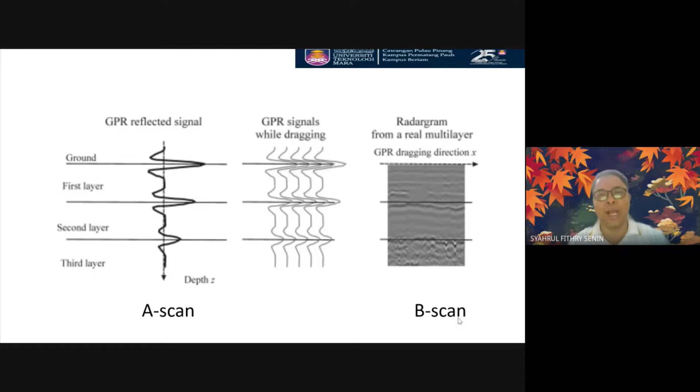Some of my research at that time was to understand the amount of moisture content in the concrete cover. So let's say this is concrete, and this is a large enlargement of that cover. Remember, this is the cover — maybe 30mm, 25mm, depending on the design.

And we put a certain amount of moisture content inside this, and we put the GPR antenna on top of this. The antenna radiates certain electromagnetic waves through the medium, and the medium reflects some of the energy back to the receiver antenna, giving reflections of that signal.

As I said, the signal variation is very complex, and you need a way to understand the relationship between the signal reflections and the amount of moisture inside the concrete cover.

Why am I studying this, the moisture content inside the cover? Because I want to know the state of health — tahap kesihatan, the state of health — of the concrete cover.

Remember, if you don't care about your concrete cover's health, in the long run you will face deterioration of your concrete quality, especially to the reinforcement — the rebar will corrode once the amount of moisture content exceeds certain threshold values.

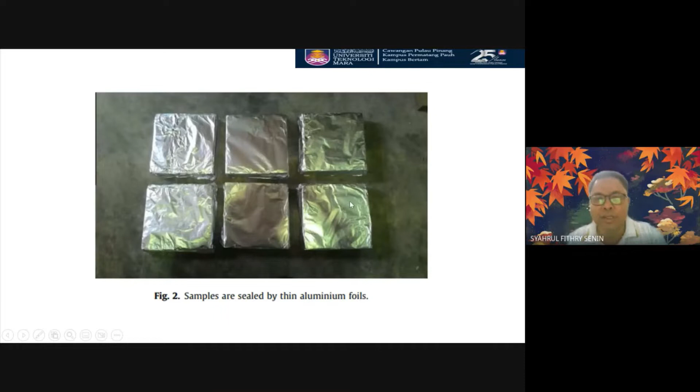And we got some results, and this result I have to close off, because this is a secret, and we have to measure the amount of chlorides and the moisture content against the data of the GPR.

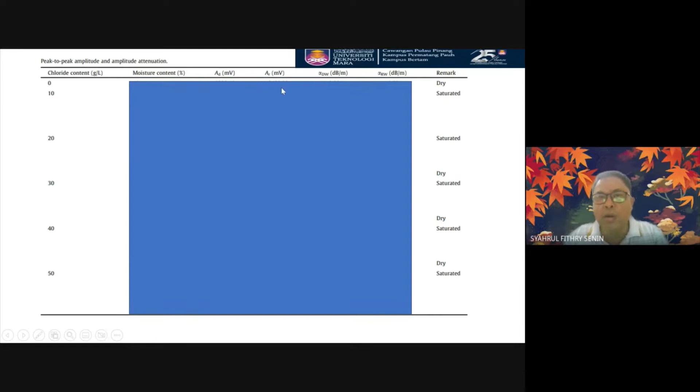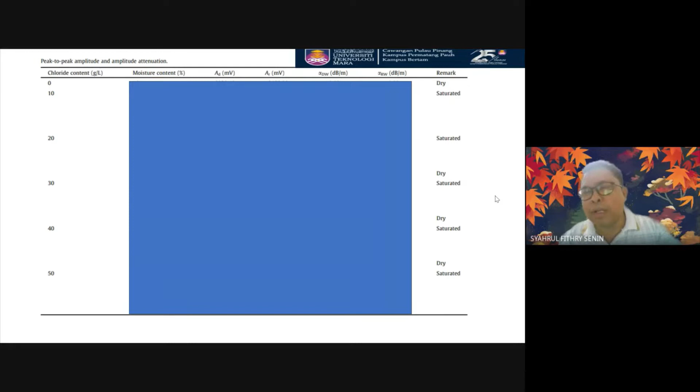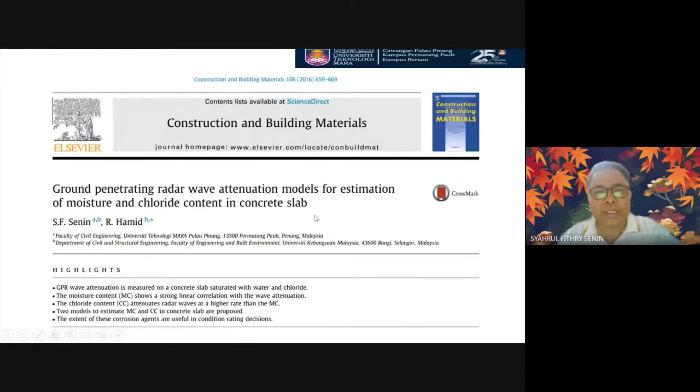Once I plotted the relationship in 3D, because at that time there was no empirical relationship developed by researchers, I used only a normal regression. It was published in the journal Construction and Building Materials, I think in 2016, volume 106, titled 'Ground penetrating radar wave attenuation models for estimation of moisture and chloride content in the concrete slab.' At that time I did it with my supervisor.

And we got this result. But at that time, I didn't use any artificial intelligence. I just used polynomial or nonlinear regression to try to relate the free chloride content, which you can see on the screen, and also the moisture content on this axis, to determine how much the reflected wave was. So if I do an experiment on the concrete cover and get a certain amount of reflection of the GPR wave, I can use this curve to estimate the amount of chloride content as well as the moisture content using this complex surface.

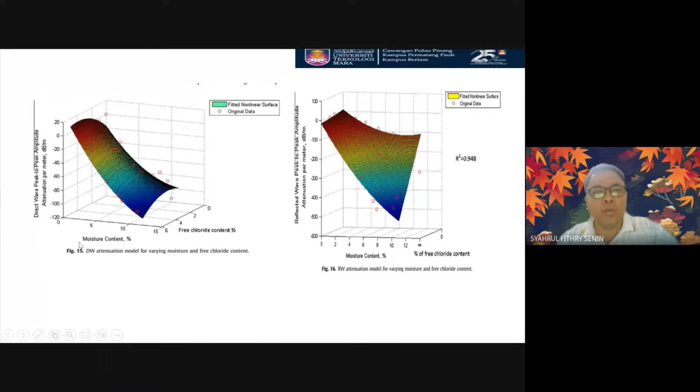So we have two models here. One is due to the direct wave, the other is due to the reflective wave. So whoever works with GPR will know the difference between these two. This was not yet used by a lot of researchers at that time, so we successfully published one paper.

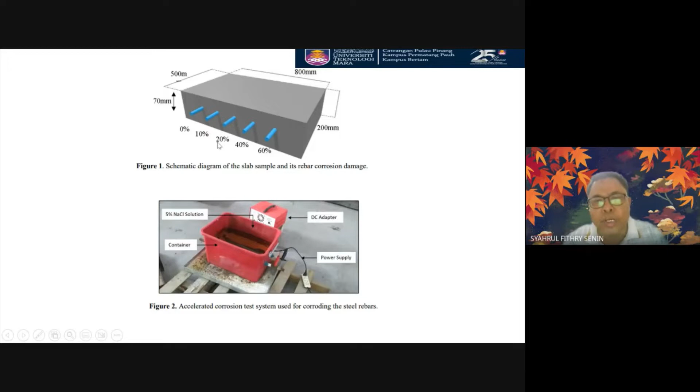After that, I tried to use B-scan. I extended my research around 2019, and we published a paper where we tried to detect the damage of rebar that had been artificially corroded. We didn't use the actual corrosion mechanism because that would take too long. We used a impressed current system to simulate corrosion on the rebar. The slab itself is 500 mm by 800 mm by 200 mm thickness, to simulate the bridge deck. This is the system we used to initially corrode the rebar, and we embedded that corroded rebar back inside the slab, then scanned it by GPR, and got these complex images.

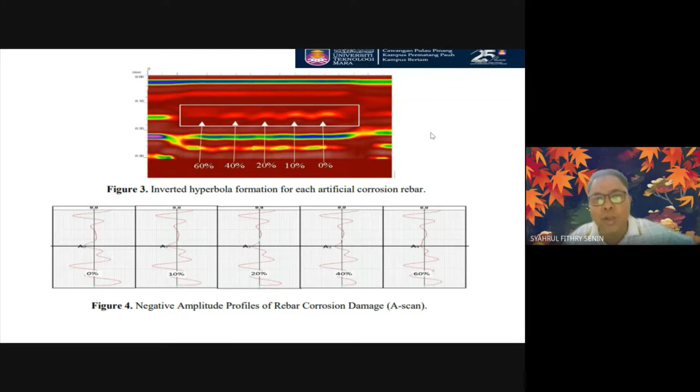And I think the lecturers at UNIMAP, and also the students, can take this motivation to develop their research, maybe in a master's degree, a PhD, or a final year project, because this is a very interesting project - to interpret automatically what the damage severity is based on images.

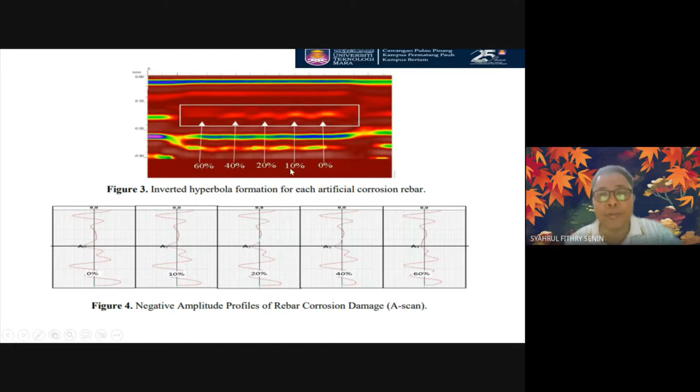We don't do any measurement, but we just pass our image to a system, and the system estimates the severity of that damage. The system can also classify the damage type, whether it's a crack problem, due to corrosion of rebar, or a void problem, and so on. These are some of the other works that have been published using the GPR system.

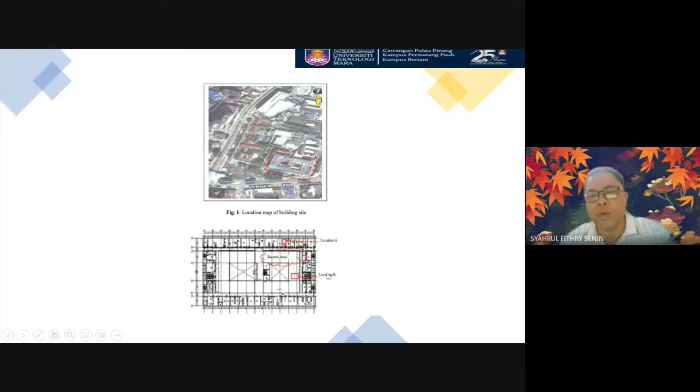It's a hospital at Kuala Lumpur. I don't remember the MRI building. One of the blocks had been under fire, and we were required to investigate the damage severity. This is the place where we focused, and we got a lot of these images.

So imagine for novice people who don't know how to interpret these images, it's a problem. It's just like if you bring your pregnant wife to a doctor, and the doctor uses some kind of equipment put on the stomach of your wife to see the images. For a trained doctor, they can understand the thickness of your baby, where the baby's head is, and so on.

So the same thing here - we are acting as a doctor, but a doctor of a building. We try to understand the location of that problem and how severe the problem will be.

So again, for novice people looking at these images for the first time, they may just see dots and spots, but not know how to interpret it. But for a trained eye like me, using a manual approach, I can identify the concrete deterioration that exists, and some cracks also introduced at certain depths of the concrete due to the fire-affected system.

So if these images were passed to another person, this is a problem. That's why we need artificial intelligence to perform the assessment automatically without any human expertise at all.

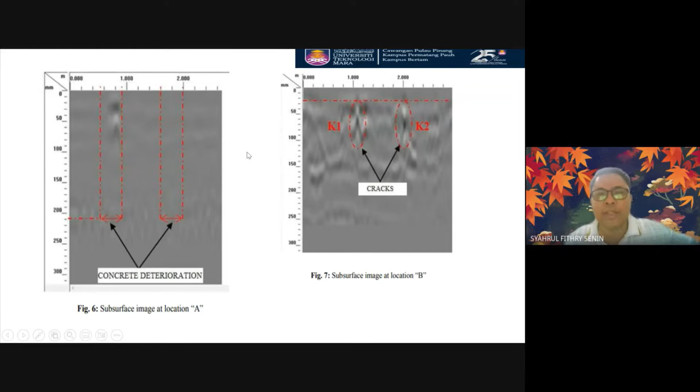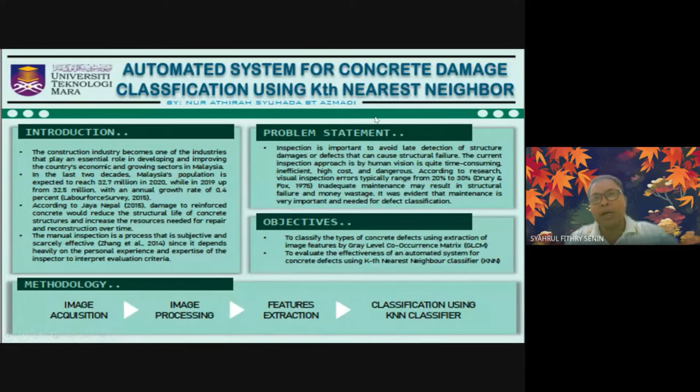So this is the algorithm that we use to detect the features for the classification.

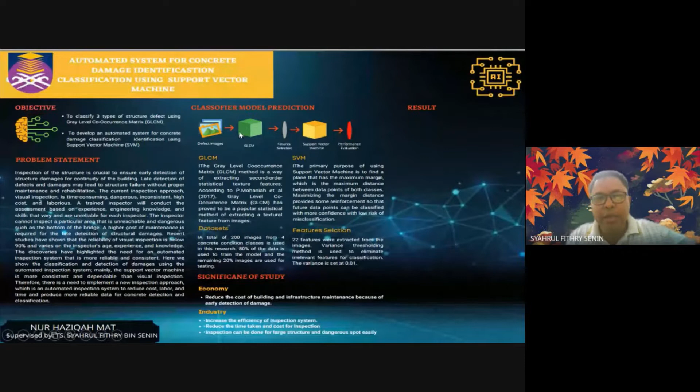And also another exhibition we entered using support vector machines. And another one, I think the more popular one, is using Naive Bayesian classifier - we also did the damage classification identifications there.

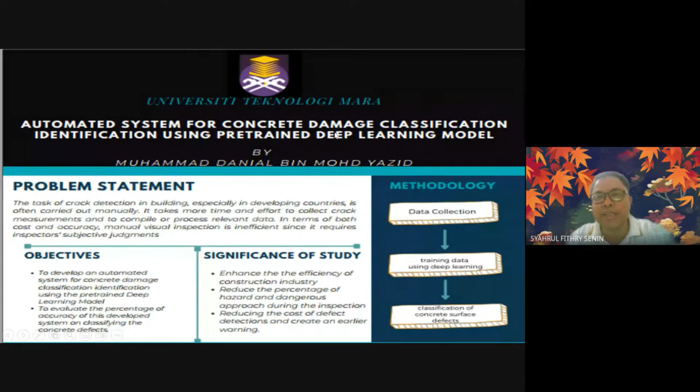This is the most popular one, I think, using pre-trained deep learning. I think most of you have come across this word, deep learning, in your YouTube videos. We got gold here for this exhibition, where we trained the images that we got from concrete to detect the damage kinds inside the concrete.

And after that, I was not only focused on the damages, but also used artificial neural network, which is a subset of machine learning and also a subset of artificial intelligence, to perform concrete mix design.

Usually, most of you will do the concrete mix design in your class using the DOE method, and you have to use a lot of charts, a lot of tables to figure out how much will be the amount of cement, the amount of water, aggregates, fine aggregates, and so on.

But using this system, we can specify what will be our grade, what will be our environment, and then the system will choose the best ingredients that you can put into your mix in order to achieve that minimum FCK or FCU.

We are using data sets based on the experiment - data sets to create a model that can automatically predict what the ingredients should be. So I'm not only using my AI knowledge in damage research, but also doing material research as well, because the domain of application is very, very vast, very big.

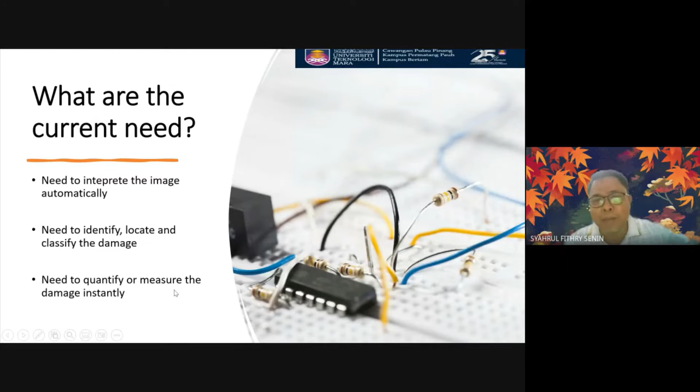In my case, to measure the damage state - how many percent, is it 30% corrosion? How long is the crack, is the width 2mm? What if there's a void - how large is the diameter on average, is it 1 millimeter? This is the most challenging part, but it's not impossible with artificial neural networks or AI.

So I think I've gone through a lot on artificial intelligence, but we can say that AI has a lot of applications nowadays, and it's very popular for human needs, not only in practice in civil engineering, but also in civil engineering research work.

A lot of companies worldwide are now investing their money because they can see a good fortune in this technology in the next decade. That investment can solve various fields and bring money to them. And if you apply a lot of money in research, that innovation will also give you fame, and you will get money for your university.

In a lot of engineering disciplines, why do we need AI? Because we need decisions, and usually decisions are done by expert people - but we are lacking expert people in the world. So how do we copy their expert mind so it can contribute to the society that needs it, in a system? That's why we need AI - because AI can copy their mind, and that mind can decide for a lot of applications, especially when we want to achieve certain KPIs or objectives.

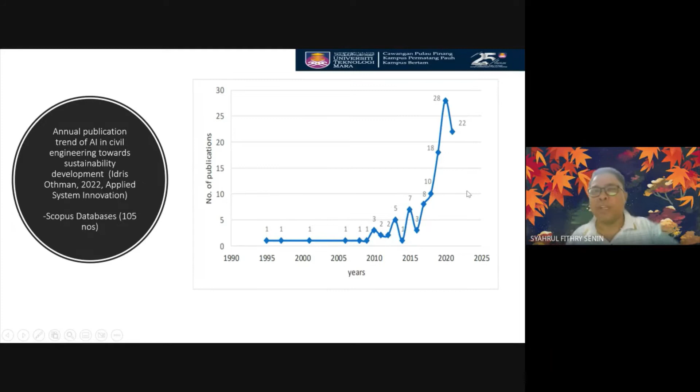You can see the trend is very, very good - an exponential growth in work published in this field. It started in 1995, very small, but the numbers kept going up until 28 in the year 2020. I think during COVID-19, for about 2 years, much of the work couldn't be done, especially to get the data, so the numbers went down.

So that's why you have a downward trend. But I don't think this trend will be downwards. It will keep positive until 2030. So it's a very good prospect doing research in the academic world.

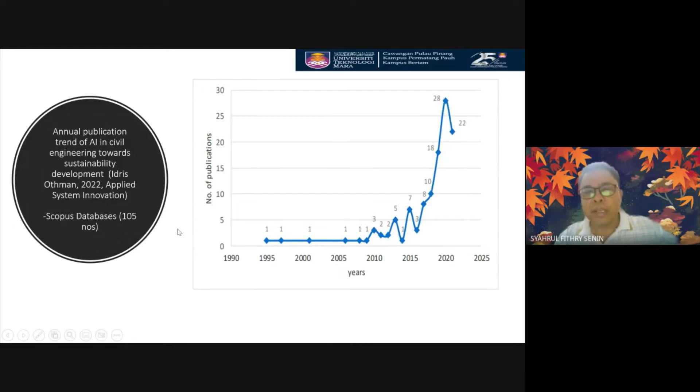You can see the publications, and the publications have been done by typing these keywords. So we type a lot of these words and we get these publications.

In terms of journals that have contributed, you can see that a lot of the journals focus more on automation, because remember, AI is for decision making. We want to have automated decisions. That's why a lot of researchers like to publish in this journal, Automation in Construction, about 57% from the 105 papers, followed by Advances in Civil Engineering.

And a very small part, which is 1%, I think this is a journal which is not so famous, but people still publish there, Arabian Journal for Science and Engineering. So you can see these are the journals as an academician that you can publish for work involving artificial intelligence. So you can select Automation in Construction. This is quite a famous journal and a very prestigious journal, I think it's a Q1 journal.

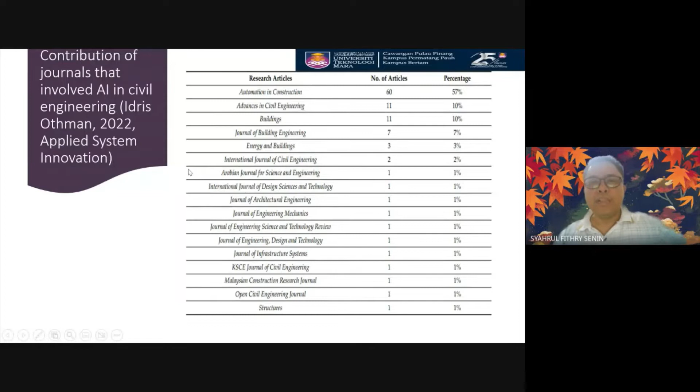Remember that the main substance of AI is data. That is the most important part. The data, a large amount of data, will be the source of the model.

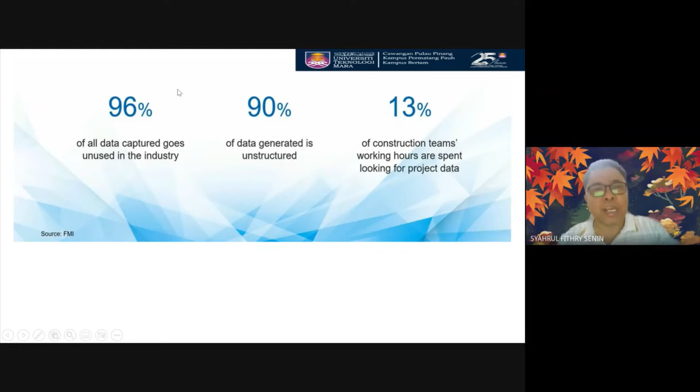However, from findings of a consultant company from the UK, especially in construction, not in research work, 96% of the data that is being accumulated in the office is not used in the industry. It's not used in the civil engineering industry. So imagine if that data is passed to us as academicians, I think we can do a lot of things in research involving AI to help the industry.

So I think it's an opportunity for the lecturers as well as the students to ask the industry whether the data is usable for AI, so that you can make use of this data, and we will build our AI model to help the construction teams outside. So I think this is an opportunity for us to do this.

And in UiTM Penang itself, we have already approached and also got a job from the Jambatan Kedua, the second bridge linking Batu Kawan to Batu Maung. And we have already been given the job to classify the damage based on the accelerometer data that they have had since, I think, 5 years ago, but it's not yet been analyzed.

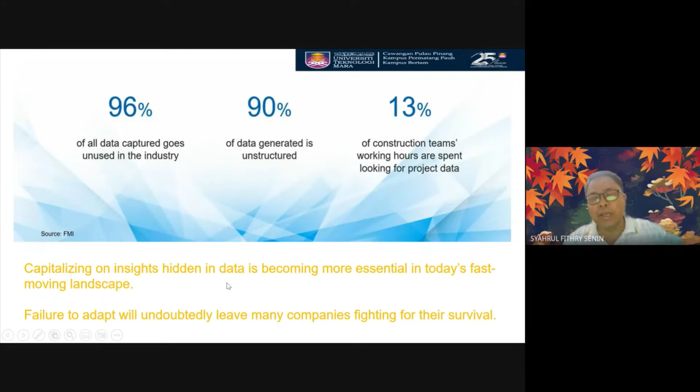So we are using that data to classify the damage, and we can consult them on what are the severity and the repairing work. So I think you can do the same thing with nearby industry to get their data, because most of the data is unused. They just put it inside the office desk and do nothing with it. But in fact, if you combine it with AI, you can solve a lot of problems, because data is the capitalizing aspect that will color the image of the construction industry.

They can collect the data by using cameras on the site to track progress, where you can see whether this column has been fabricated or not, and they can map the state of the construction stage. So you don't need as much supervision, the number of people supervising will be minimal, so you reduce the cost of construction by using this AI system. You can view the site remotely, and we can get the data.

As I said before, data is the essential part of the AI system, where we can perform decisions on what to be done. If, let's say, today this column should be fabricated, but by using that camera, it has been detected that this column is not yet fabricated, the system will artificially try to find that and report it. As an engineer, you can act on that problem remotely, so you don't need to be at that place at all times. This is one of the companies.

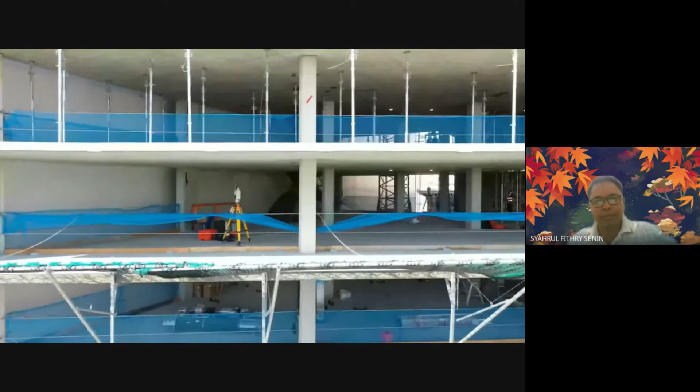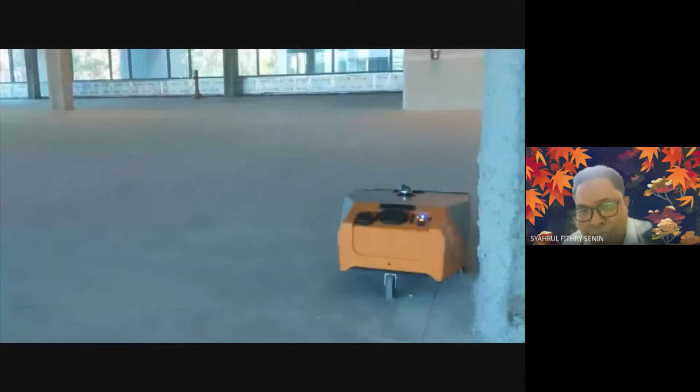So this system is using robots, and the robots can draw on the slab where the location of the wall should be. You may see that the dimensions are correctly printed on the slab. This is done by artificial intelligence, and there is one person there controlling the system. This system gives good efficiency for the laborers so that they can put their wall in the right spot.

Imagine how much the cost will be reduced by using robots.

This drawing is drawn using BIM technologies. I think most of you know about BIM technologies. That robot does its job based on the drawing done by BIM, building information modeling. I think most of you know about this. That's why I think it's good for all of you as students to study BIM, because BIM is one of the technologies linked to AI. So it's good for students to learn BIM nowadays before you graduate. That is my advice to you, as preparation before entering the job market.

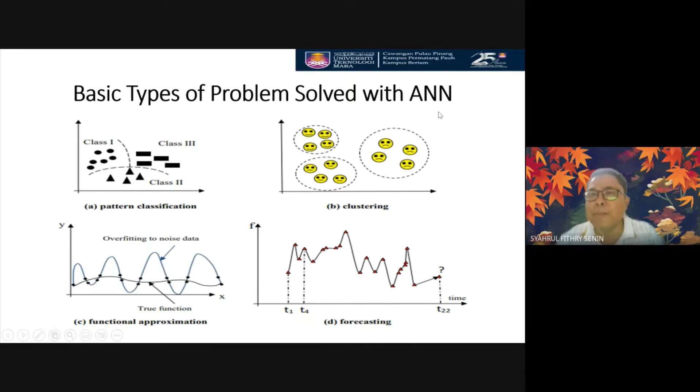So these are the basic types that you can model or solve using ANN. Remember, what is ANN? It's only a model for solving problems by mimicking the human brain mechanism.

And why do we use ANN, artificial neural network? Because of 2 factors. The first factor is the learning ability. Our ANN has the flexibility to learn anything - I say again, to learn anything. There is no impossibility, all is possible using ANN because it has a lot of learning ability.

By using this learning ability, you can construct a model that describes the cause and effect relationship. As I did in my concrete mix design, I made a model showing cause and effect. The cause is the factors controlling the concrete grade - water content, cement content, fine aggregate, coarse aggregate, maybe super plasticizer and so on. That is the cause, and the effect is the concrete grade. In reality, the relationship between cause and effect is very complicated because you have to use a lot of graphs, that's why I'm using ANN - because it has a very flexible learning ability. No matter how complex it is, it can learn.

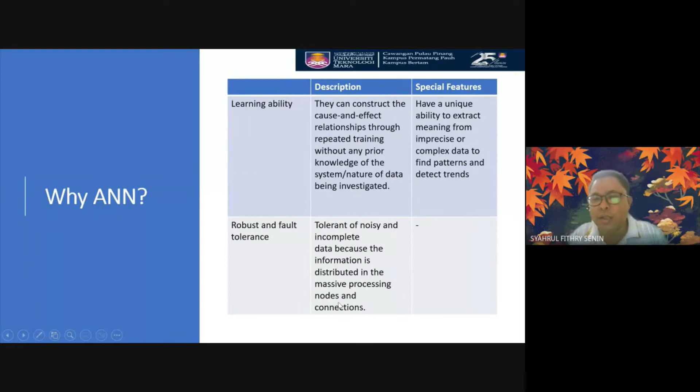Why? Because we have a lot of nodes. I will show you the meaning of nodes after this, and also the connections that try to distribute that amount of noise or errors so that your system is much more robust. That's why I like to use ANN in my research.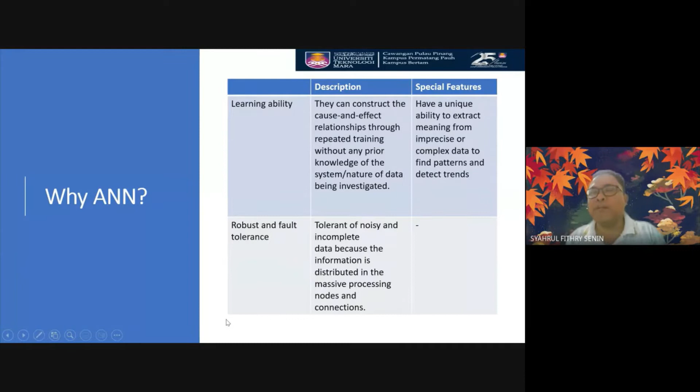Especially there's one point here. If you have a lot of data but there are no empirical equations, meaning no one has derived the relationships, but you have a lot of data, then NN is a possible solution for your research because NN can adapt to your data and get the relationships. So when data is abundant and there is no clear theory, then you can use ANN.

If you have a lot of equations, there's no need to use NN because other equations can already explain that problem. Maybe you can use NN at that time just as a comparison. But if your research is very new and you have a lot of data collected, then this is a possible way to manipulate NN to adapt to your data.

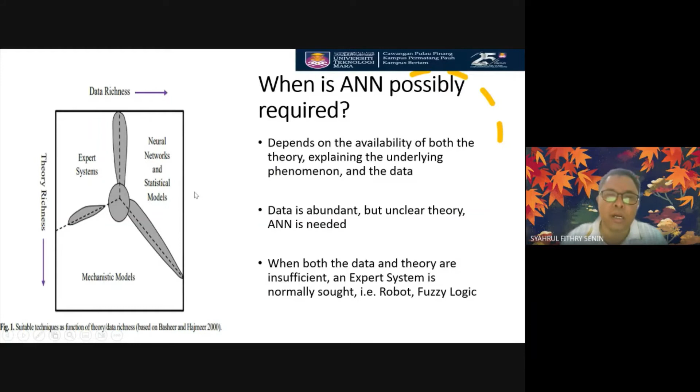Now we want to go deeply into how ANN is used to learn the data, and after learning, it can make decisions. I'll give you an analogy from a baby to an adult. As a baby, focusing on the baby's brain, you have a lot of neurons. Neuron is the biological cell inside your brain that performs thinking, stores information, and so on.

However, this is due to God's will: the neurons are not connected well at first. The first neuron may connect to the second, but neuron number 2 to neuron number 3 may not yet be connected. As the number of connected neurons increases with age, your brain will have much better thinking capabilities and can perform better decisions.

Why can you perform better decisions? Because you learn from data. The baby learns from data from the father, from the mother, from the surroundings that give input, and the brain learns from that experience, and the neurons become connected, connected, and connected.

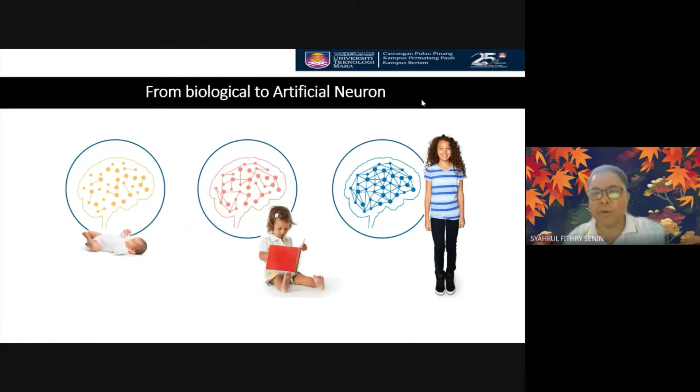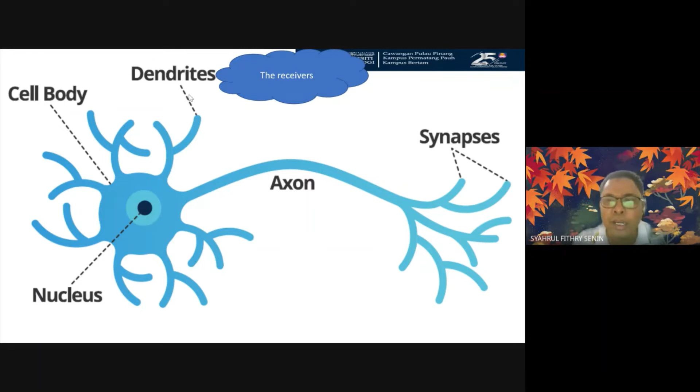So the input may be from heat. If you touch your hand to a heat source, logically within milliseconds you will avoid that heat source automatically. Why? Because your hand will transfer that heat signal to the dendrites.

That dendrite will send the signal to the nucleus, and that signal will send to the axon. It's a long cable, like a cable line, to the synapse, and this synapse will connect to another neuron.

When the signal of the heat exceeds a certain threshold value, then you will have a connection from this nucleus to another nucleus. That means at that time, you have a decision.

So your decision will be that your hand will avoid that heat source. That is the system that will be copied in the computer artificially.

So again, I want to wrap up. In the neuron, you need the inputs. You need network connections by the axon, and you need to have a transferring mechanism from one neuron to another neuron by this system that you call synapses.

And these synapses will only activate when the signal exceeds a certain threshold. If it's less than that threshold, then that connection does not live, it will die.

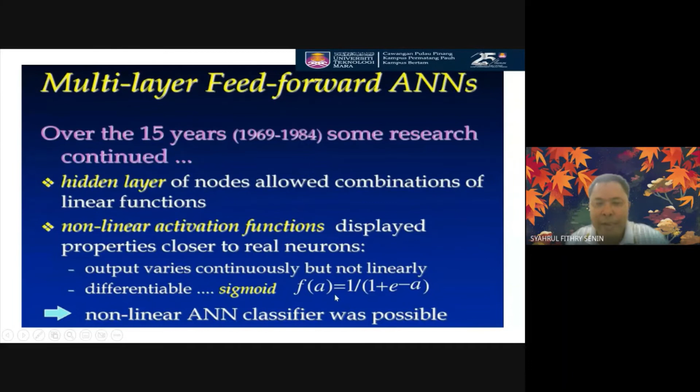And remember, when you want to prepare your ANN system, any input that you want to feed must be very, very significant. It must be clean, with no error if possible. Let's say the data is complete, so that when you put a good input, then you have a good output. Remember this phrase: garbage in, you get also garbage out. So if you feed wrong data, you don't have... I don't think you can expect a good model. I think in anything, in any model, linear regression, polynomial regression, response surface, you need very good data, because the quality of result directly relates to the quality of data.

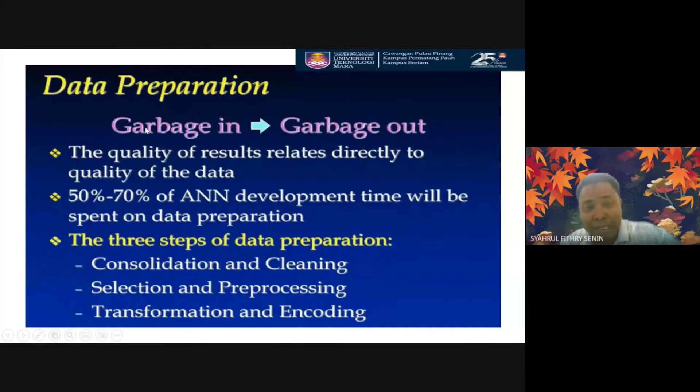For example, if your input tries to relate the state of student absenteeism inside your class to the CGPA, your input data may be 'hadir' class or 'absent' class. So before using the ANN, that 'hadir', which is in word form, you have to encode it to maybe number 1, and 'absent' you encode to be 0. So that is the meaning of encode - you try to convert from word to numeric so the ANN can easily learn the data. This is called data preparation. You must prepare the data before doing any ANN. And as in statistics, you must recognize the type of data, as usual - nominal data, ordinal, interval, continuous - because this will greatly affect your data preparation.

And usually, in my case, to make my model iterate much faster, I will put my data in a range. I will convert my data to a certain range, meaning I do data transformation, because your data might be something like -3,200.

You have data to be 1 times 10 to the power 9. So that number of arrays, I will try to transform to be a certain range so that my model can converge faster. If not, maybe it takes a longer time.

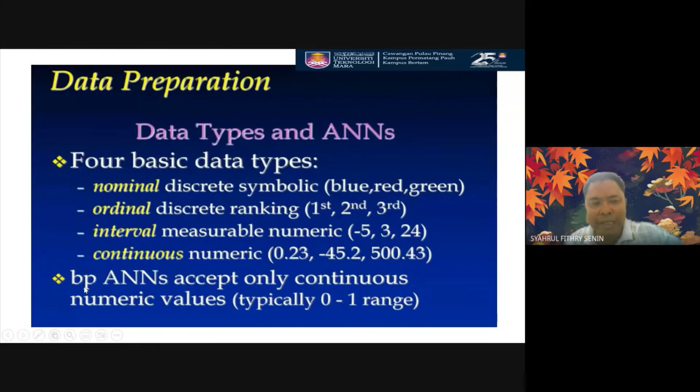So this is my practice. I'm using data that has been normalized to a certain range. In real life, what I'm talking about just now is more on the research work.

We are not yet talking about the real application in civil engineering work, meaning engineers outside. So to make sure your NN is much more commercial based and can bring money, can be commercialized, usually you will top it up with an IoT device. You will top up your algorithm, you must add cloud computing, computer vision, and sensors. In my case, I have already done it because I tried to mix my GPR and also my camera with ANN, to make that innovation much better commercialized.

So what is cloud computing? I think most of you know cloud computing. Remember, your data has been taken continuously for 24 hours for 1 year. Imagine, I don't think you can store that image or data on a pen drive or your computer's hard drive. So you need a system that can store the data instantly, in real time, without you having to carry the data. By using cloud computing, that data can be stored and you can access it along with your AI algorithm so that it can learn.

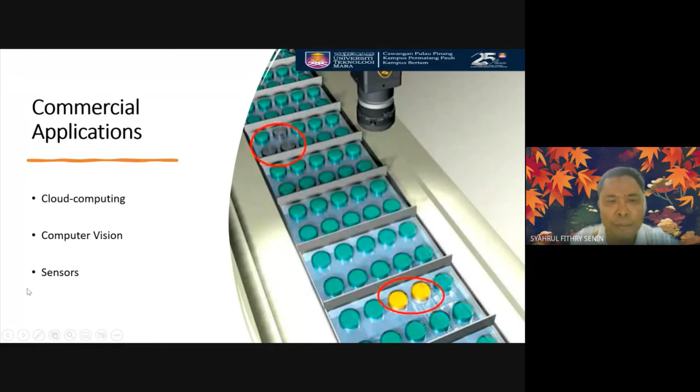So as I said before, computer vision. By using a camera, as we described before, you focus on the object that you want to target. Let's say you want to target the crack on your bridge, the propagation of the cracks. After that, that image will be segmented out using an image processing algorithm. You try to segment out the crack only from the surroundings. After that, you use a network that has been designed before, like AlexNet or GoogleNet, to train the segmented image so that it can learn.

And you can detect whatever you want. For example, with images of vehicle types, it can detect whether the vehicle is a car, a lorry, or whatever. Maybe for people working there, coming into the office, you can differentiate this is an engineer, this is a carpenter, this is a bar bender, whatever, or detect the defects, as in my case.

After that, you store the data to cloud storage, as I said, to make your work much better in terms of data transferability, and you perform data analysis. This is good for practitioners outside, because after you detect certain things, you want to report to the managers outside so that you can react, so you can react with the administration.

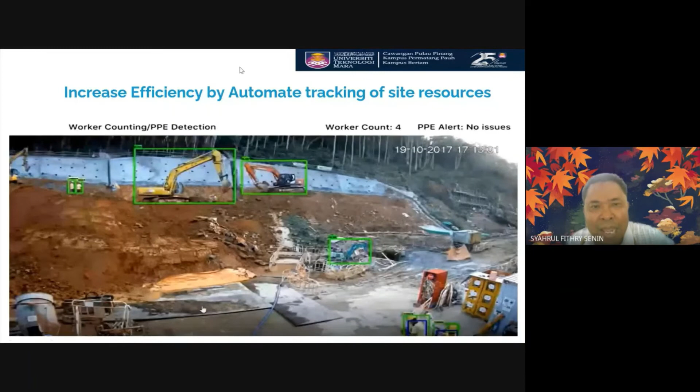The box can also count how many persons there are, and also how many machines there are—bulldozers, excavators, and so on. This is good because it increases the efficiency of site resources, so you need very minimal site people to monitor. You just use a camera with computer vision, plus an ANN algorithm, to perform monitoring. You can see the person counted there, and it alerts if there are any PPE issues and so on. It's very handy—this is one application on civil engineering activities on site.

Another application is truck arrival monitoring. This is crucial because you want to monitor whether the right vehicle is coming at the right time, and what the plate number of that vehicle is—because we don't want other people inside our site. By using this, you can see there is a virtual gate, not a real gate. When the vehicle passes, it counts the number of cars or trucks in and out, and detects the license number and the truck counts.

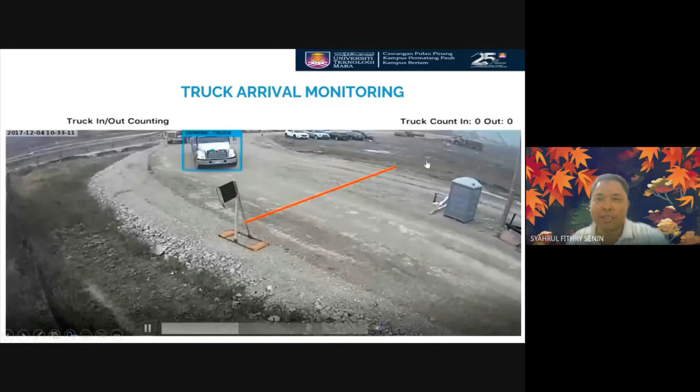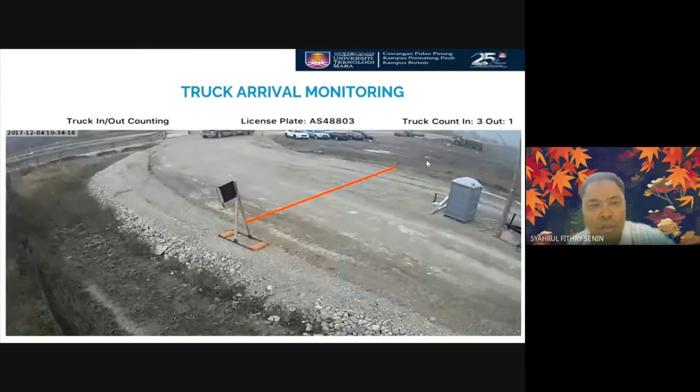So it's very good to monitor remotely using ANN. You don't have to be there, and you can enjoy your resting time maybe at home while monitoring this—though you don't even have to monitor it at all, because there will be a report.

There will be a report given like this on your mobile phone. You can see there is a vehicle, a dump truck, inside your site at this time, and the plate number is there, and the total number of loads is 28, and it can estimate the load per hour for this truck with this trip. So imagine it's a very relaxed job without going outside—you can just sit at the beach, maybe while on holiday, but do your work remotely using this ANN technology. It's very, very important.

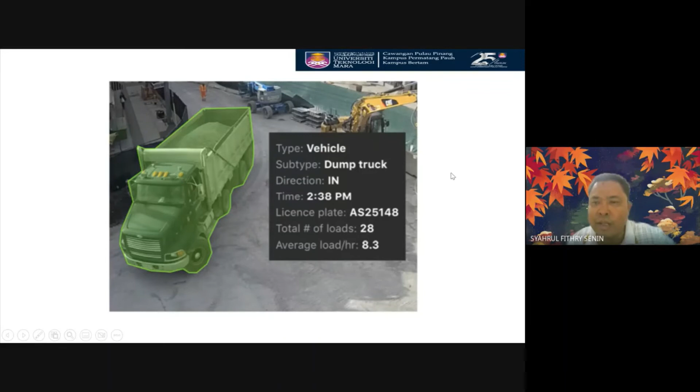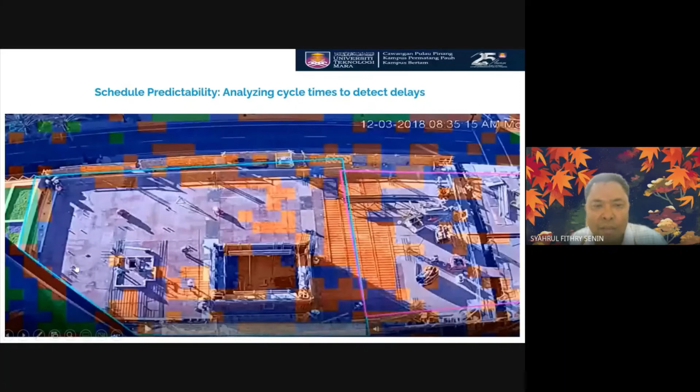Very interesting. Another thing is if you want to check the progress of your work at site—because from one floor to another floor, you want to know how many percent of the area has rebar installed, how much of the area has concrete, and where the people are. So you can put a camera maybe on a certain level, maybe on the crane, and classify things with colors.

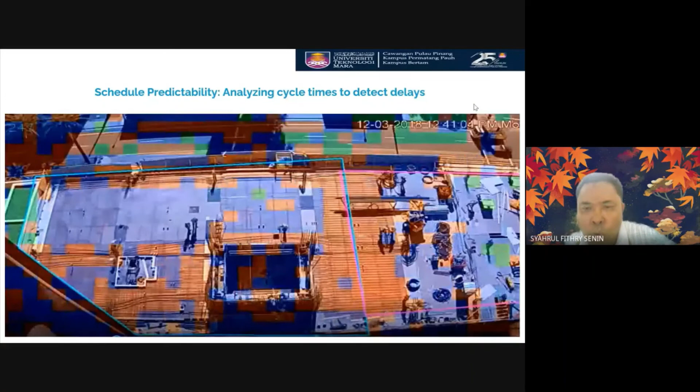You can see the orange color is the place where rebar has been put. This is done by ANN, because ANN has the flexibility to classify. So you can get, over time, how much is the percentage of rebar completion.

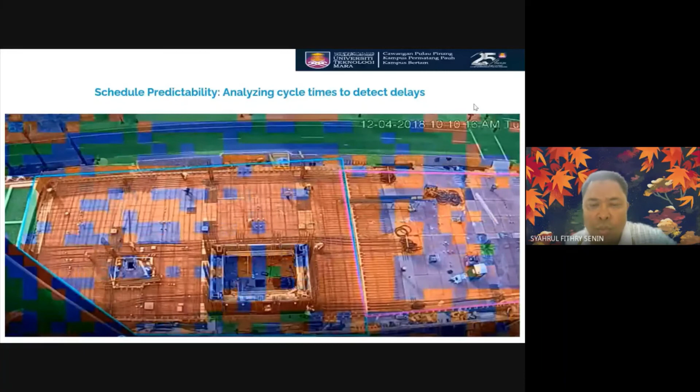Another application of this technology: you can put the camera maybe at the top of the ceiling, and on the helmet of your workers who are inside or outside the office, you can put a kind of QR code, so that once the QR code is under the camera, it can detect the type of trade—because the people inside or outside the construction site can be a carpenter, bar bender, engineer, or admin staff.

Can you see that? It can detect the trades, and you can know what time the people go in and out from the office. You can see there is a message there—there is in yellow already, it's not so clear—but it's very good. You can do this remotely using a camera.

So maybe this kind of technology gives a wake-up call to the lecturers in this university, maybe to invent this kind of innovation and commercialize it. Maybe this has been done globally, but why not do it locally in Malaysia? Maybe no one is doing it yet.

I think during COVID-19, from 18 March 2020 until recently when we ended our COVID-19 measures, we had a problem measuring distancing—1 meter, 2 meters between one worker and another worker on site. So we can use ANN to measure and estimate the distance between them by camera.

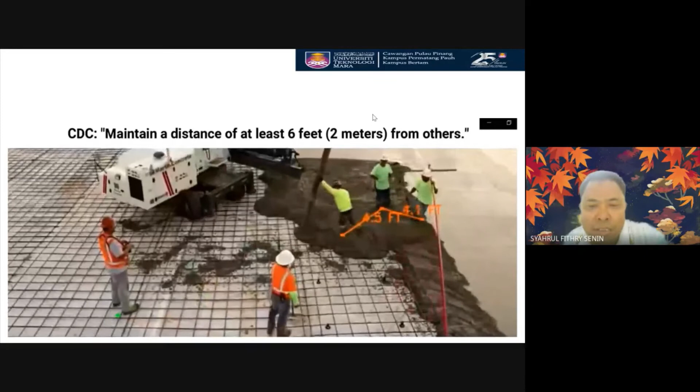Can you see that? It's very interesting. So we can comply with the local authorities' requirements, whether they are working or not according to the distance.

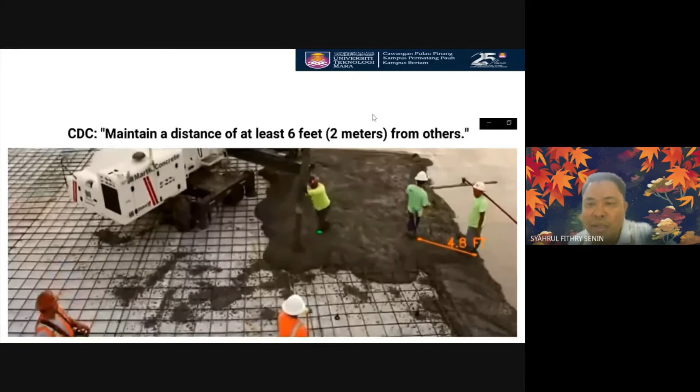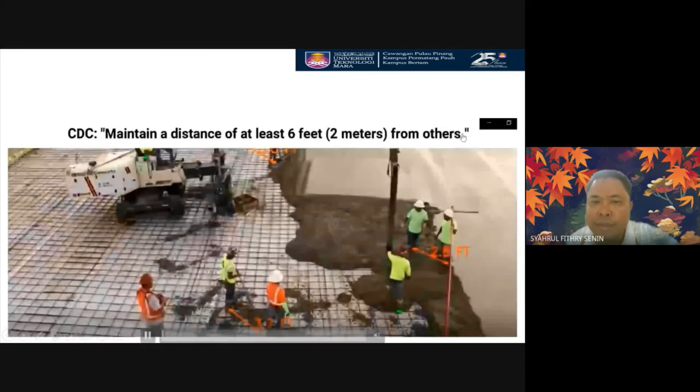But I think not for nowadays, because nowadays COVID has ended. So at that time we needed that technology, so that people on site could comply with the local authorities' guidelines, especially distancing between workers. This can also be used on site.

You can see whether people are not following the social distancing guideline, which is colored by a red box, whereas people more than 1 or 2 meters apart are categorized by green color. So it's very good for the people.

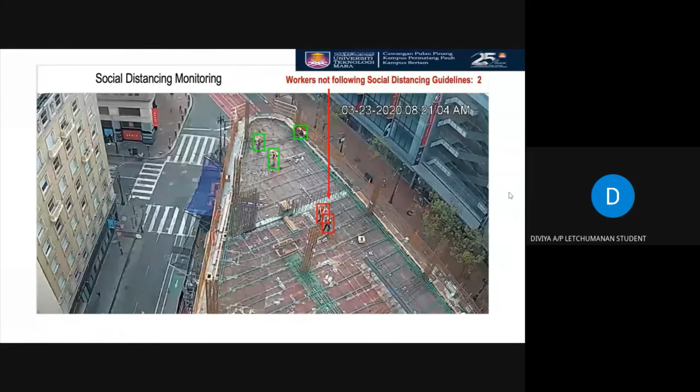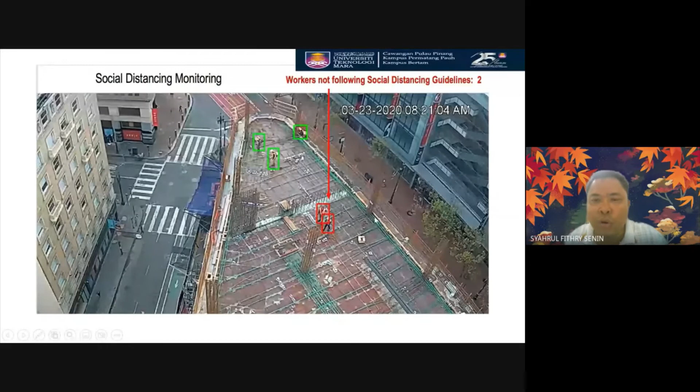I think this application can also be used to check whether the right person is on site, or maybe the person is from outside the organization. So you can do classification also, by asking workers to wear certain kinds of clothing, so the camera can detect and classify whether that clothing belongs to the organization or to people outside the organization. With practical training, the camera can distinguish and differentiate. So it's good for monitoring, security, and so on.

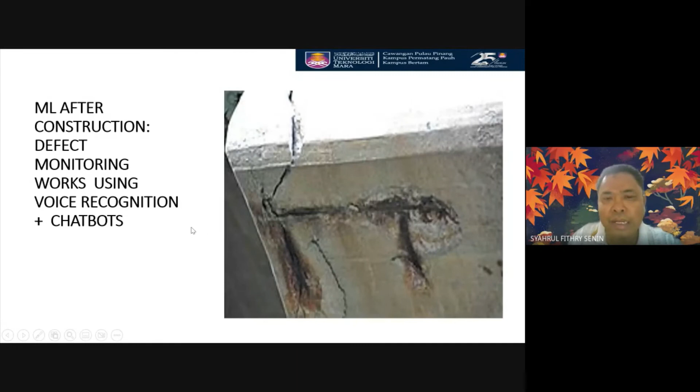That is all application of ANN during construction, before construction, and in operation of construction. Actually, machine learning can also be used after construction, especially in my domain, to detect defects. After a building is constructed for certain years, it faces some deterioration, and we can use machine learning or ANN to monitor and check the status of that defect and its severity. So I'll give you a video taken from the Philippines, showing a system that has been developed. Please enjoy watching it.

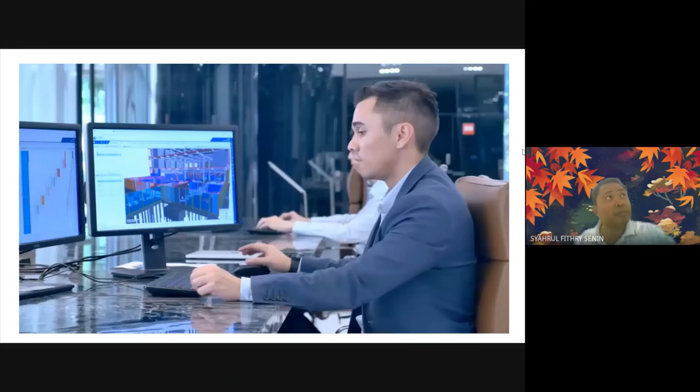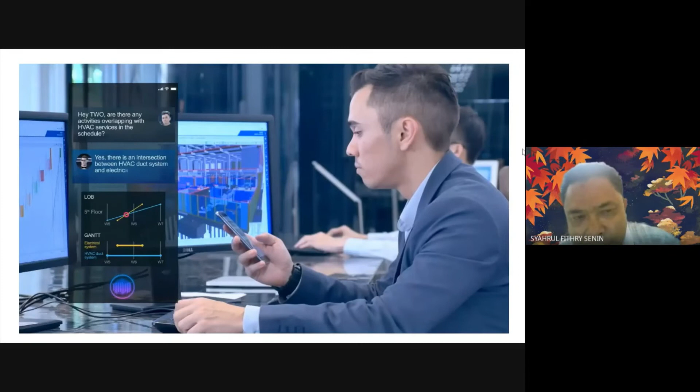We can also ask McTWO via chatbot to match the best building materials from the product catalog. McTWO not only gives the results, but also provides an analyzed report based on these results with price and quality conditions. With this intelligent outcome, the decision maker can easily decide the best products for the project.

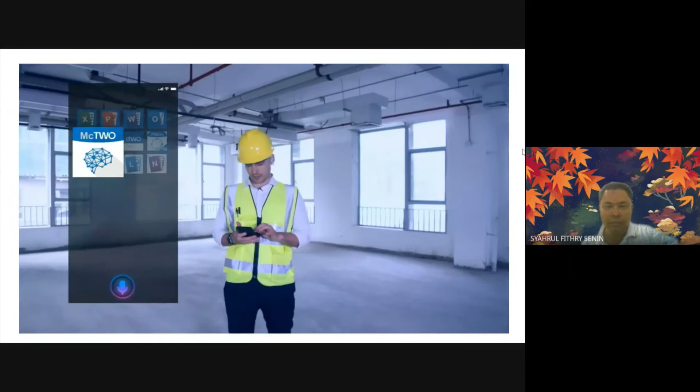McTWO is supporting safety and quality inspection on site with smart guidance. Hey McTWO, I'm on the 3rd floor. Please show me the inspection checkpoint. Hi Sergey, please follow the walkway for today's inspection.

Hey McTWO, Anderson Construction has to repaint the wall on 3rd floor, zone number 2. Add it to the punch list with due date next Monday. Issue added, floor plan highlighted for Anderson Construction.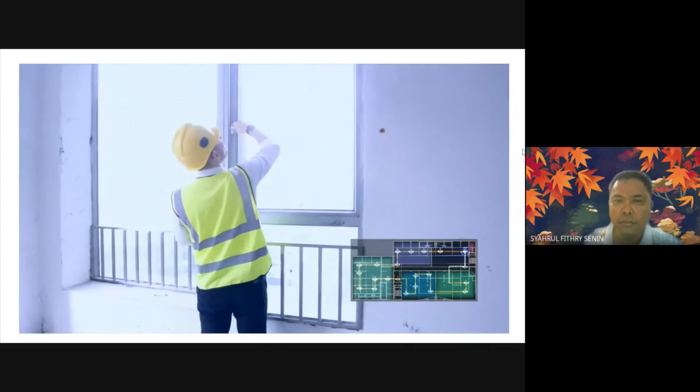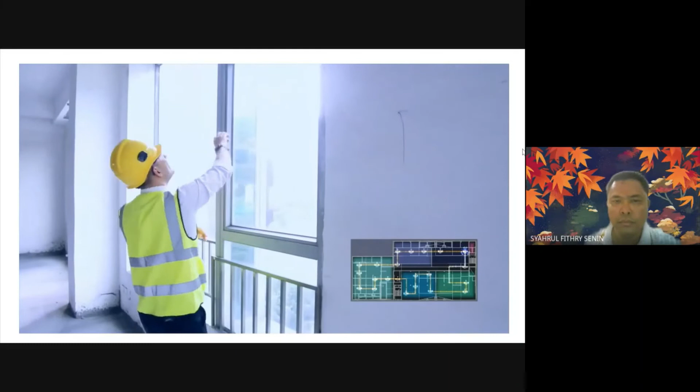Hey Mac2, Walker Engineering has to fix the window on the 3rd floor, room number 5. Add it to the punch list, due date next Tuesday. Issue added, due date confirmed.

Hey Mac2, Walker Engineering has to cover the electric duct in the technical room on the 3rd floor. Add it to the punch list with due date next Monday. Done.

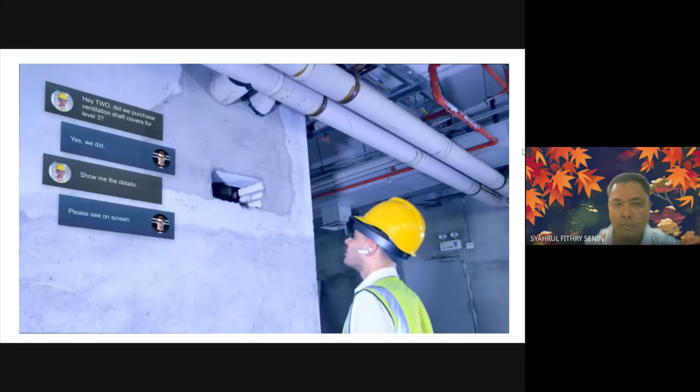Empowered by mixed reality, TWO can integrate the virtual model with the physical site for precise checking. Hey TWO, did we purchase ventilation shaft covers for level 3? Yes, we did. Show me the details. Please see on screen. Okay, let's take a measurement.

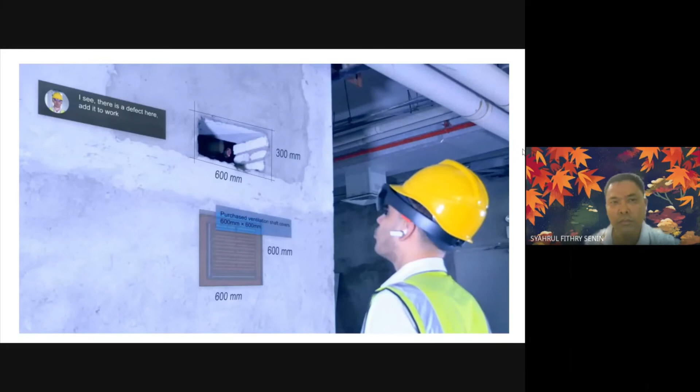I see, there is a defect here. Add it to the work list for Anderson Construction. Defect added. Thank you, Mac2.

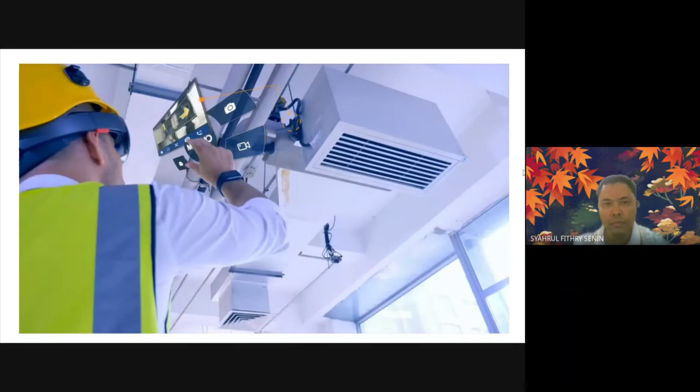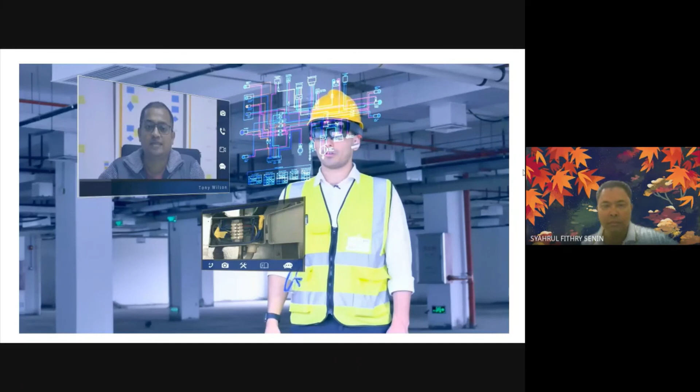Hey Mac2, can you call Tony? Hi Sergey, can I help you? Hi Tony, can you please check the power distribution box for this unit? Yes, I'm checking from my data. This is the electric diagram. I'm sure this is an incorrect installation. Yeah, I also think so. Thank you, okay, see you tomorrow. See you, Sergey.

Hey Mac2, create a defect for this AC unit and attach a picture of the power box to it. Issue added and assigned to the electric department. Thank you, Mac2.

Okay, so I think most of you know another application of civil engineering, which is for highway and traffic engineering. Most of you know about this, to classify the type of vehicle at intersections or along the roads, and to count the number of cars.

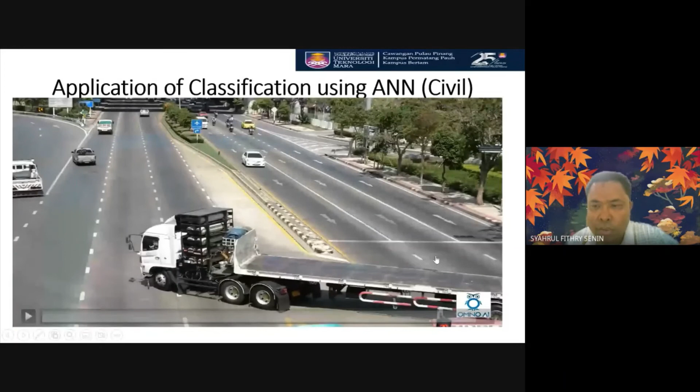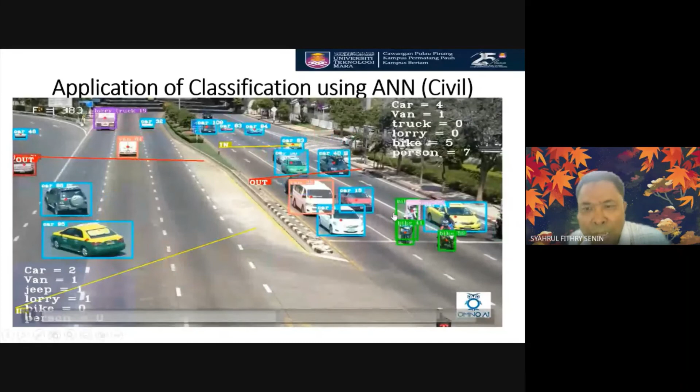So this is one application for traffic engineers. You can count the number of vehicles that you are interested in on certain roads, and determine the types. I think this is for traffic counting. And you can apply this to pedestrians if you want. You can extend the application to other fields.